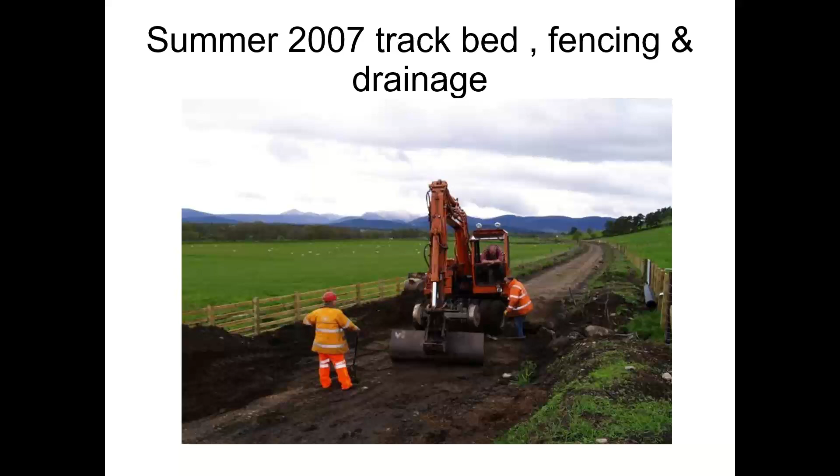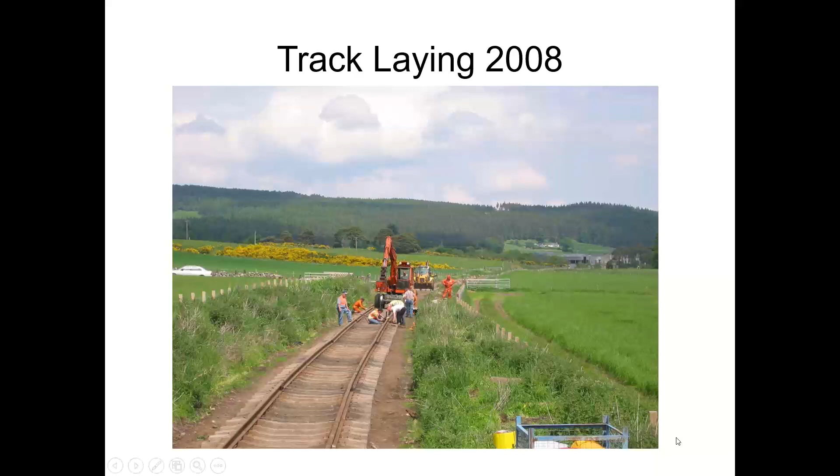Well, then a year later we've got a lot of the track in. It's all concrete sleepers, flat bottom rails, and most of it uses the fishtail clip - I think it's an SHC clip, which is a devil of a thing to get in. Once you know exactly where to hit it, they go in fairly easily. Away in the distance, just in front of that set of farm buildings, you can just about make out the masonry ornamental towers that are part of the River Dulnain crossing.

In 2005 and then again in 2007, we took delivery of many hundreds of what seemed perfectly good concrete sleepers that had been rejected from the West Coast main line, I think it was - there were lateral cracks in some of them below the rail position. Again in 2007, we were fortunate to take delivery of complete 60-foot panels of flat bottom rail that were taken out at Drumochter. Using these rails and concrete sleepers gave us all we needed to get the railway built out to the River Dulnain, with plenty left to go part of the way towards Grantown-on-Spey.

Now here we are at the River Dulnain before the original Joseph Mitchell 1862-1863 bridge was taken away and scrapped. Terribly sad really, but that's the way it is. In common with most bridge structures on the Inverness-Perth line from that date, amazingly ornate masonry was built to no great purpose other than to appease the local landowner. This bridge is near nothing - nobody lives nearby, nobody looks at it, it's pretty remote, yet it had these wonderful and intricate towers and turrets.

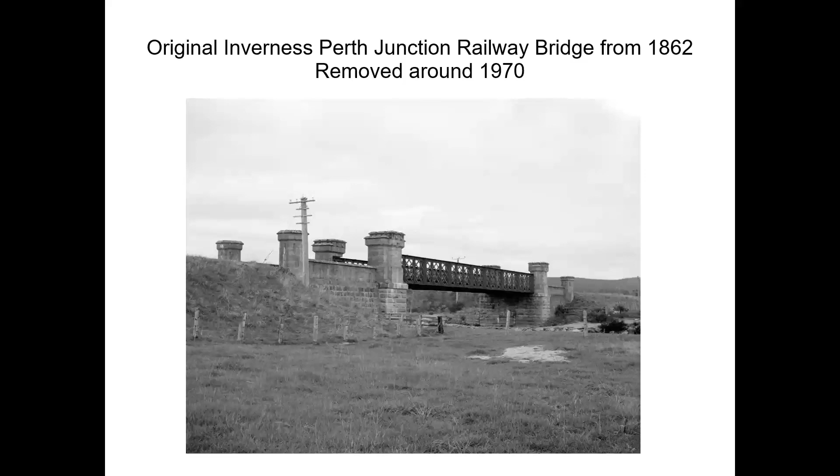So that went away, and we were faced with finding the money and wherewithal to re-erect it in a modern fashion over a gap of 80 feet. We knew that whatever happened, it would have involved taking a bridge, new or second-hand, to site by rail and then lifting it onto the masonry abutments beyond. So we stopped the track about 3 panel lengths back from the bridge and left the erection for another day. However, by this time, a solution had manifested itself.

I'll talk briefly about this. In our exploratory works prior to re-erecting the bridge, we came across these amazingly intricate roller bearings, which were part of the original Highland Railway Bridge, left behind. All 4 bearing points had these complicated rollers and double plate arrangements, which must have been anticipating an awful lot of longitudinal movement when these were devised.

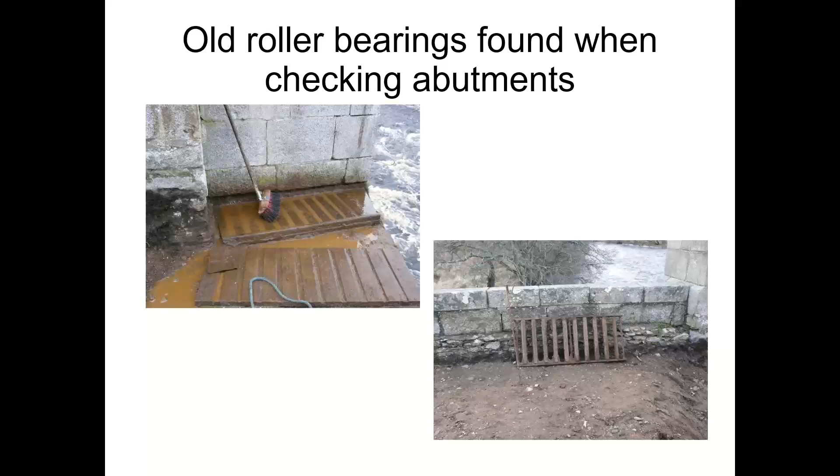I think amongst the group tonight there's a certain Davy Dow, and he was, I'm pretty sure, instrumental in locating this bridge structure you can see in the top left. I think the late Alan Stewart was involved, and possibly yourself, Stephen, as well.

I went down with George McNair to have a look at said bridge, which is in Merry Street between Motherwell and Carfin. It was built in the early 60s as an access. The owner had no need for it, and were prepared to offer it to the Strathspey Railway if we could use it, provided the Strathspey Railway took it down and transported it up to Inverness.

I went down there with no real set impression what I was going to find, but as we looked at it, measured it, and checked out what we could by looking into the hidden cavities at the bearing points, it seemed to be in tremendous condition. A report was done, presented to the Strathspey Railway Board, which I wasn't on at the time, saying the bridge could be used. It was a twin road bridge, as you can see in the bottom image. All we needed was the two side girders and one set of deck beams.

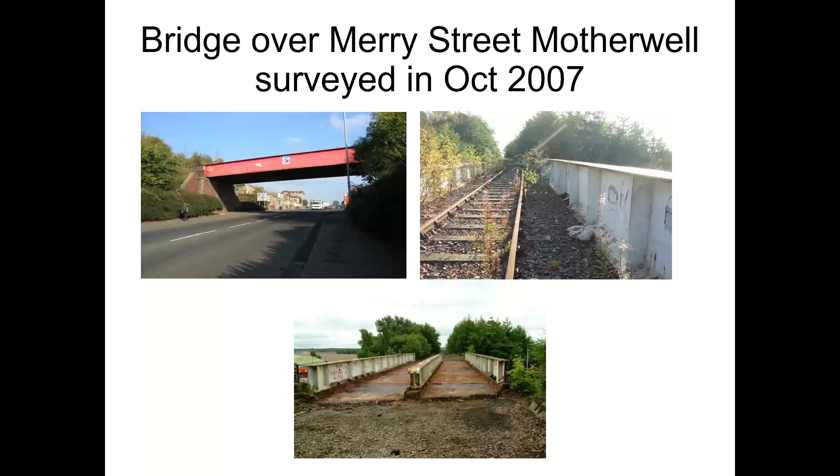A wonderful image that Stephen Muirhead found for us of the bridge structure going up early 60s. Pretty rudimentary traffic management and not a safety hat or high visibility vest to be seen.

After a period of deliberation, the Railway Board, I wasn't involved in this, but a contractor local to the site was engaged, who dismantled the bridge in summer 2008, I think it was, about almost a year after we surveyed it.

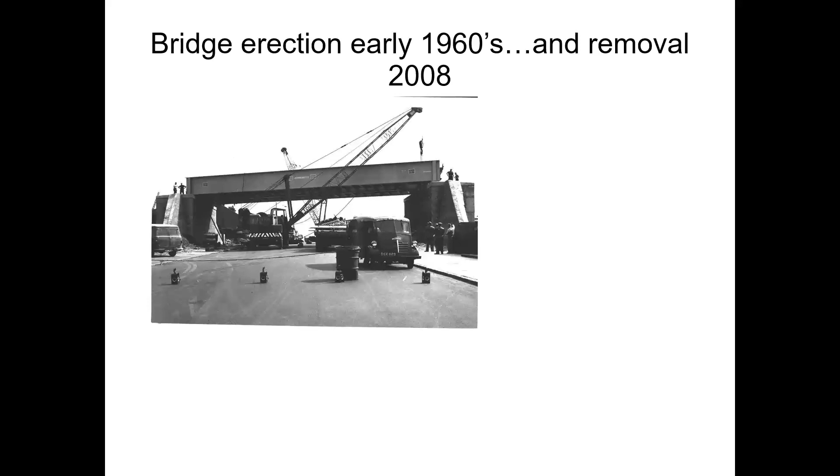It was taken to a yard, broken up, and the components we needed were taken by rail from Mossend, all the way to Inverness, and then stuck on the front end of a southbound train and thence to Aviemore. From there we pulled it to Boat of Garten and set it into store until we could get round to modifying it, painting it, and hopefully then erecting it.

There was a lull for a few years, and the Rails to Grantown group sort of evolved from the main company board, and various things happened. Not an awful lot happened in the field, to be honest. Money was the main consideration.

The Rails to Grantown group got themselves a new chairman, a non-railway person, but who has left the organisation now. But what he did seem to have great skill in was getting money out of different people and wheeling and dealing. His name was David Fraser. He, with support from the Cairngorms National Park, Highlands and Islands Enterprise, and some persuasion, got the bridge girders modified to the design I did, and painted.

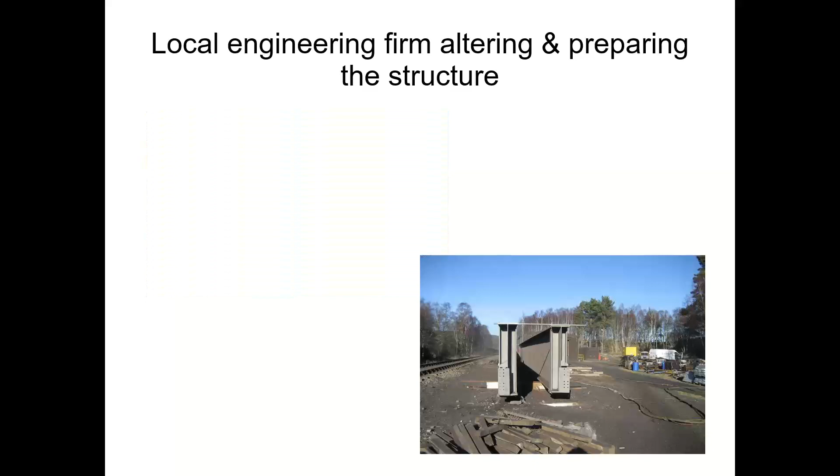And we cut up the deck components into individual cross beams to sit between the two cross girders. This was all done in late 2012 into 2013.

I remember an impromptu meeting in the lodge at the Strathspey Railway, and I think Stephen may well have been there, and David Fraser certainly was. We got chatting that this bridge, as erected on the North Yorkshire Moors Railway a year or two previous, had been done at very favourable rates by Volker Rail, and perhaps similar could happen in the Strathspey.

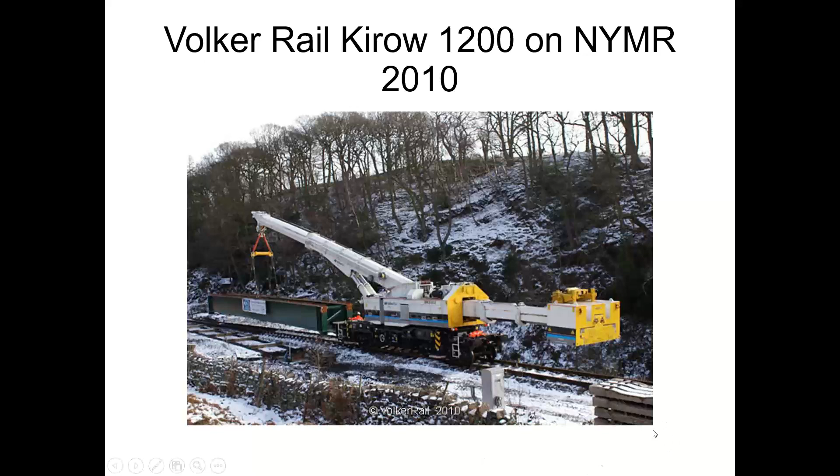To David Fraser's credit, he got the names and addresses of all the firms in the UK who had a Kirow crane with the ability to drop our bridge into place, and he went away to speak to them. I think that meeting might have been late summer, early autumn 2013.

I never really thought much more of it until one day David phoned me up and said, Colas can erect the bridge and they're coming to do it on the 13th and 14th of February. I said, next year or the year after that, David, because whilst we had track out to the River Dulnain, it was far from complete. Lots of fittings weren't there, joints were fly fished one bolt instead of four, and a gap right up to the bridge had still to be installed.

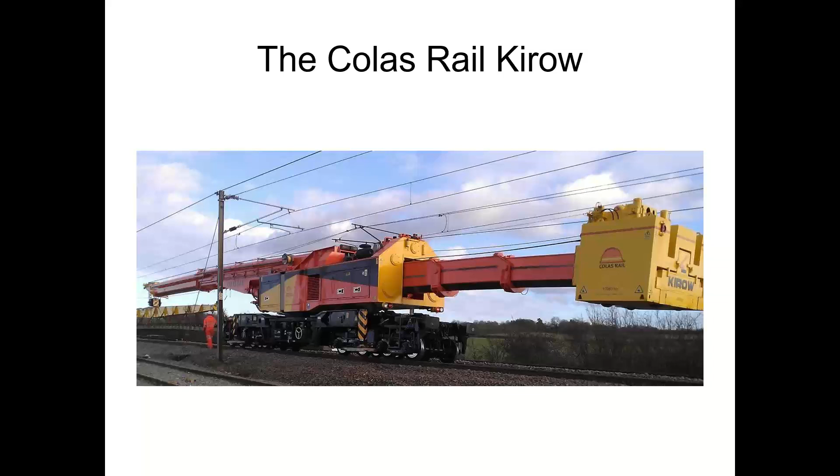However, we deferred all permanent way work elsewhere in the railway that winter and set down to getting the track up to scratch for Colas to come, and managed it with a fairly open winter. I think you were there by then, Ian, and I don't remember many weekends we didn't get working. No, I think we worked every weekend. The weather was okay. Colas sent their supervisor up. We ran him from Aviemore right through, checked all the overbridges and things, and was very satisfied with the track that the crane had to run on to get out to the river. And up it came 12th of February 2014.

Strathspey's own Class 27 pulled the Colas setup through from Aviemore the day before, on the 12th.

Here it is, just north of Broomhill Station. The bridge to be erected is on the left of this image. The crane, as you can see, is pointing the wrong way, so we do a swing round, and that's another double image that's gone wonky. The two girders had been got ready, and they were taken through a few days before.

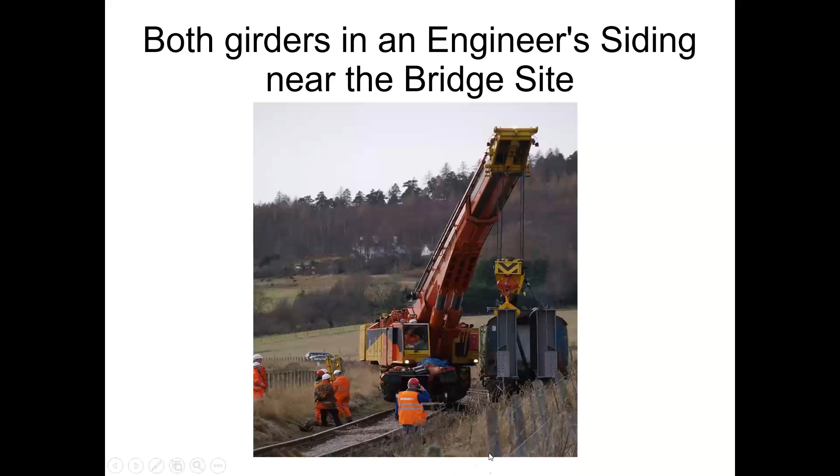Parked in an engineer's siding that we had the foresight to build just short of the bridge, and the crane was an absolute wonderful piece of kit. It was just effortless. 15 tons, was just nothing to it. It ran along beautifully.

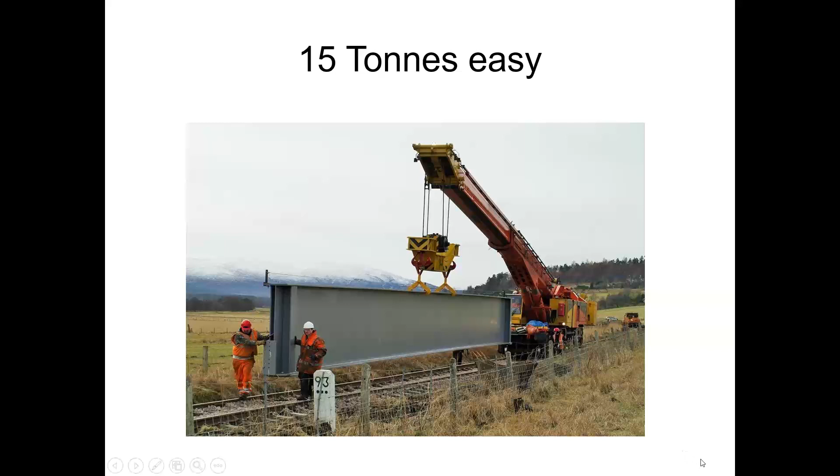Oh yeah, there was lots of spectators that day, including a BBC outside broadcast unit. This thing made the BBC News that night, and there was also somebody flying around taking drone camera images, which is the first I'd seen of these little things.

This is the upstream girder going in, and the downstream girder, which probably won't show - did briefly. We knew everything would be a tight fit, but it fitted as was expected.

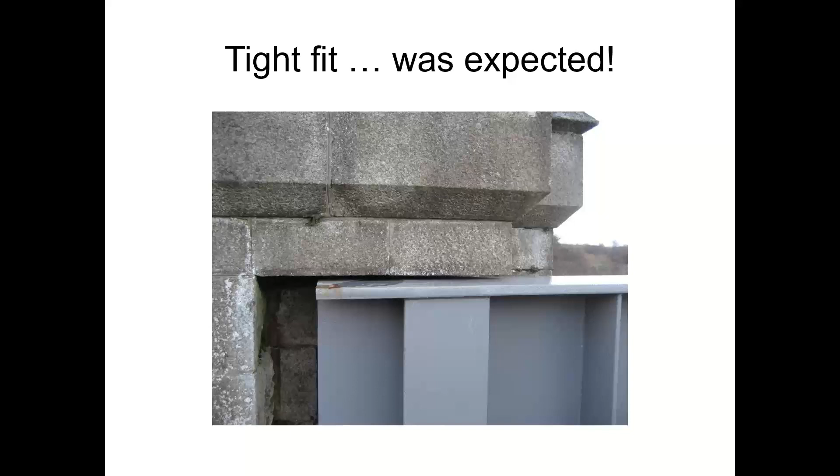So by lunchtime, the two girders were in, no hitches. We had our lunch, happy and contented. The Spey people there are the ones with the dirty high visibility vest. The fella with the yellow hat is David Fraser, who was, I suppose, as pleased as any of us. And the chap next to him was Jock Hay of Colas, who was a wonderful guy, very, very good to work with.

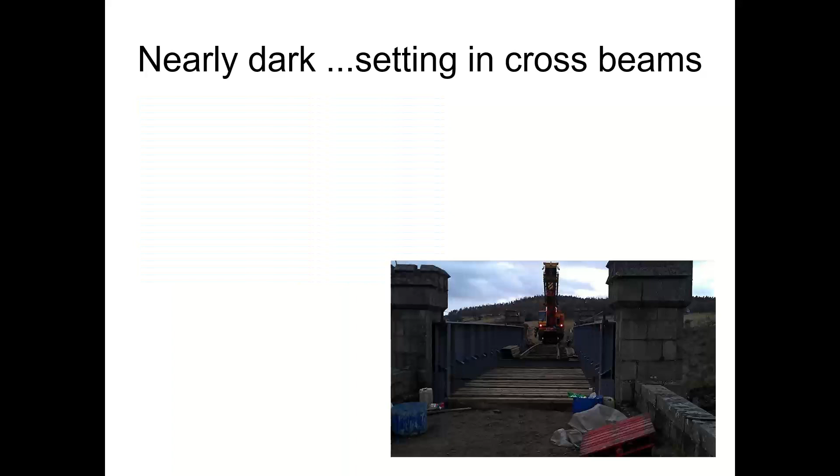I think the crane worked that afternoon until it was dark, getting in the cross beams and doing as much as we could before it went back south. No, that one didn't stay. I wasn't there the day after the erection, but as far as I remember, the crane was finished with by lunchtime, everything was gathered together. We pulled Colas set up through to Aviemore, and the crane went away south on the 15th.

Then later on that year, we decked out the bridge. There was a channel way beam underneath each rail and a timber beam set into that, and the rails are screwed down onto the same, and the deck is closed off in timber.

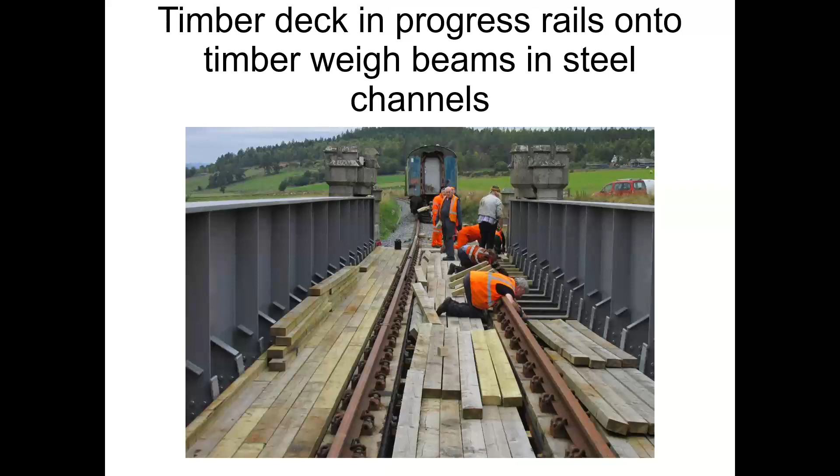A couple of years ago, we had to get a steam engine onto it for photographic purposes. This is Caley 828, the Caledonian Railway loco that resides at the Strathspey Railway. It's owned by what are known as the Caley 828 Trust now. And I think it's the only steamer that's sat on the bridge.

And since then, we've done some fettling up. I think the pegs that you can see there are Chris Doig's handiwork. The new bridge deck construction is a lot beefier than the old Highland Railway one was, and the railhead level is somewhat higher than it used to be back in BR days. So there's a bit of bunking up with ballast to get everything to the right level.

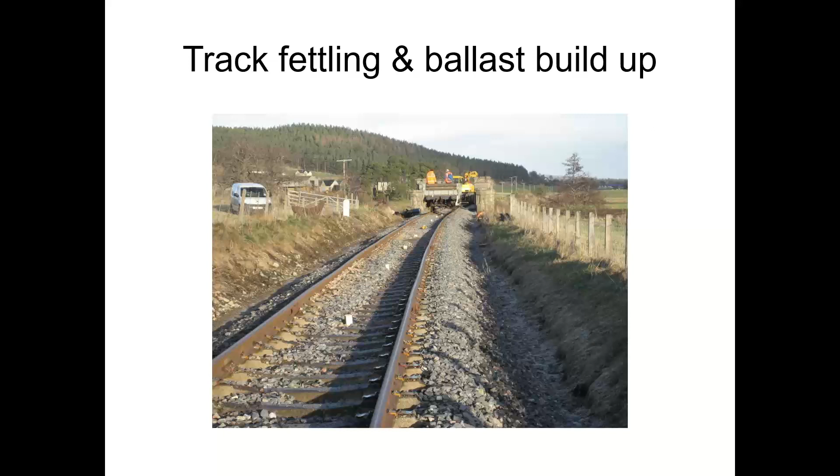And there is the bridge as was last summer, desperately waiting for trains to come trundling along from Broomhill, over it and onwards towards where I'm sitting, towards Grantown-on-Spey. And I think that's the last of my images, Ian.

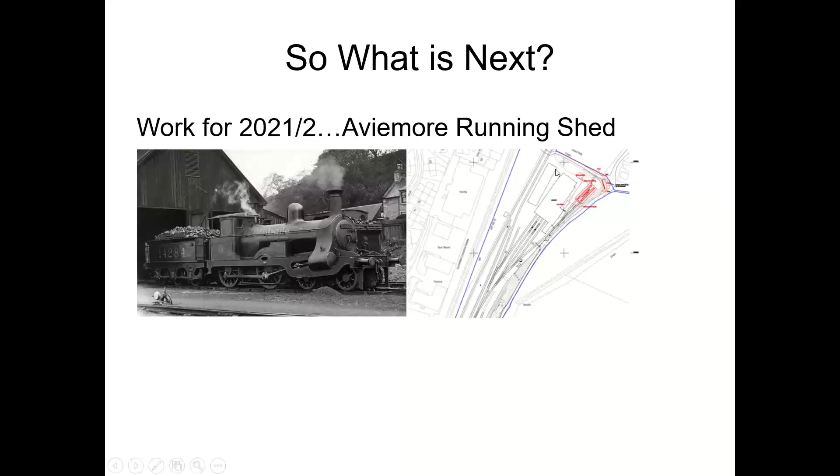You can see that we have the 4-road engine shed that's still there, and adjacent to it, our carriage maintenance facility. And that is what it's proposed to look like.

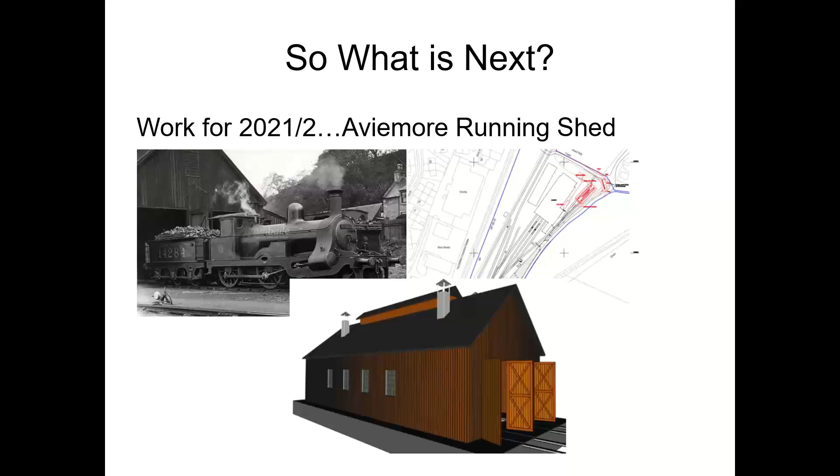The Permanent Way works are due to start imminently. We have done some of the demolition works and much of the material has been transported down to site. So I think over the spring and summer, we can look forward to some hard labour laying in the new alignment.

The big question is, though, are we going to get to Grantown? I think the general feeling is, well, yes, we'd very much like to, but there is a very big but, of course.

There's always been a long-running desire for the Strathspey to go from a place to a destination. And of course, much as Broomhill is a lovely spot, it can be a bit windy. As Mike has made clear, it's kind of in the middle of nowhere. The nearest village, which is Nethy Bridge, is about 1.5 miles away.

The Rail to Grantown team has taken several forms over the years, but it was reconstituted late 2017, 2018 I think it was, and in a relatively short period of time, a draft TAWS order was submitted to Transport Scotland.

That was in 2019, and consultation was held with the local public in Grantown, in late summer. Comments came back, as they always do, and unfortunately, because the environmental statement had taken quite a long period to action, it was felt by the National Park, amongst others, that the ecological survey work in that draft was now out of date. So we had to go and do it again, which is several thousands of pounds.

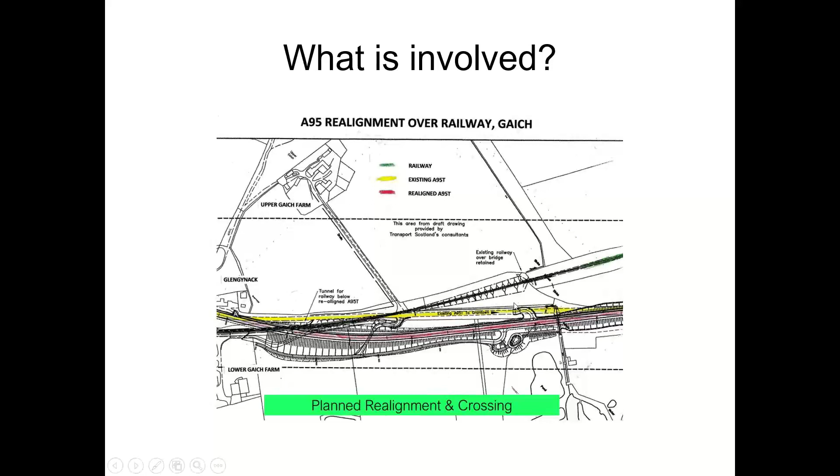So that shows the current A95, which is a strange alignment, the proposed A95 in red, and the reinstated railway line, including the earthwork, which goes two-thirds to the right of the image. Beyond that, the earthworks are still in place. It's colloquially known as the bridge to nowhere, because the abutments and wing walls are still there, but the earthwork has been taken away.

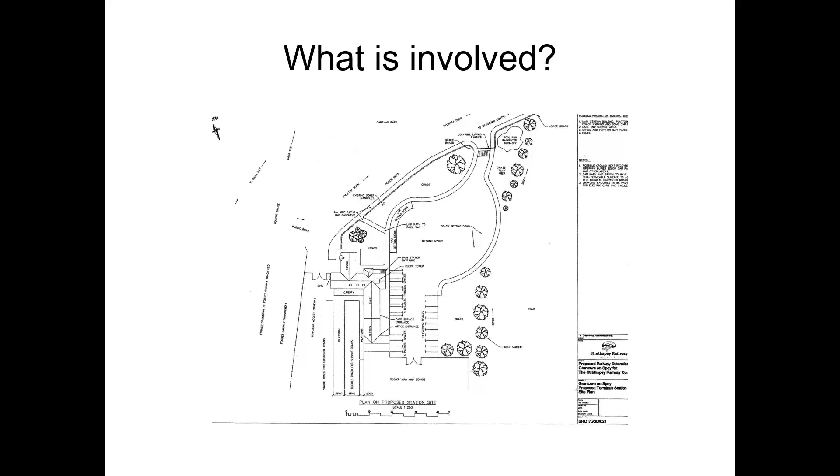This is the chosen site for the station, and will involve us dropping off the alignment through new earthwork into the station site, which is felt will be more than big enough for our purposes. That is an outline of the proposed station site. It's opposite a caravan park, so it's felt it's a good location in terms of footfall, but also in terms of access.

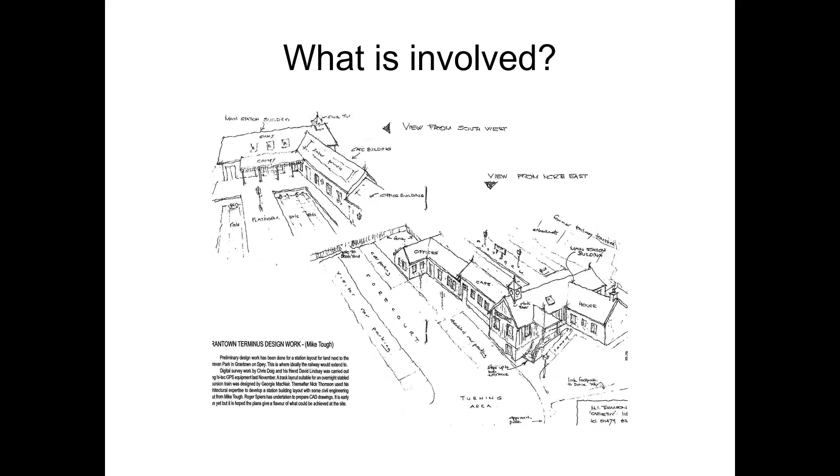And that is architectural drawings produced by the former finance director of the Strathspey Railway Association, who prior to his retirement was an architect. The feeling of the buildings is very, very similar to those at Aviemore, albeit in a different orientation.

So, how much? It's a big number, a very big number for the total project cost. We think the Scottish Government element of it is about 5 million. Rail to Grantown need to find 2 million.

Rail to Grantown also need to find 2 million for funding for the station and the track, although obviously some of that will be in kind because of volunteer effort, and that in kind is thought to be upwards of £1 million. Now this was produced a few years ago, I have updated the date. We don't believe that we will be likely to see significant work, depending on funding, before 2025.

The Scottish Government approval is uncertain without the £2 million contribution. But without an approved TAWS order, how can we raise the money? So we are in a bit of a cleft stick there, and a catch-22 situation.

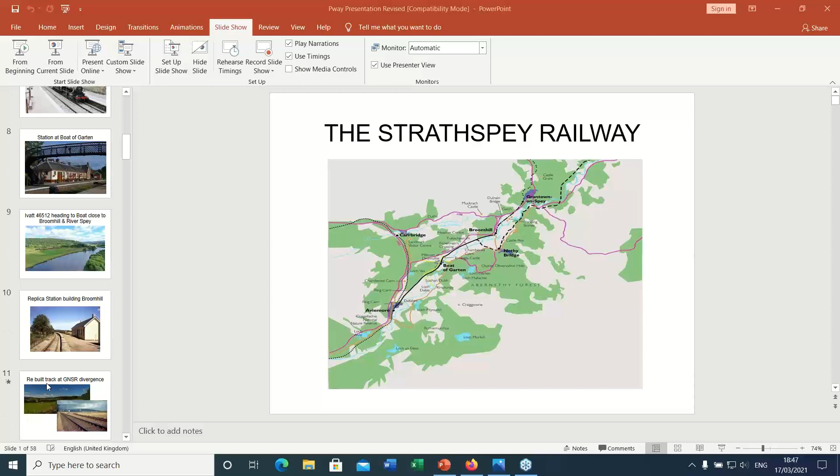And the other image in the same, in the winter. My other observation was you mentioned the SHC clips on F19 concrete sleepers. In my opinion, these were the best concrete sleeper ever invented, and I regretted their demise when there was plenty of them on the southern west coast, down at the Lockerbie-Carlisle end of the west coast, when I was in the maintenance team there. Seeing the local boys tackle SHC clips as a two-man job with a heel bar and a chisel bar, it was stand back and let them at it, and watch you don't get struck with one. Entirely safe, they knew what they were doing, and they could rip out those clips quicker than you could take out panel clips. I love the F19s.

A question about your bridge way beams on the structure. Did you mention, and I might have missed it, if they were hardwood, and were they new or second-hand?

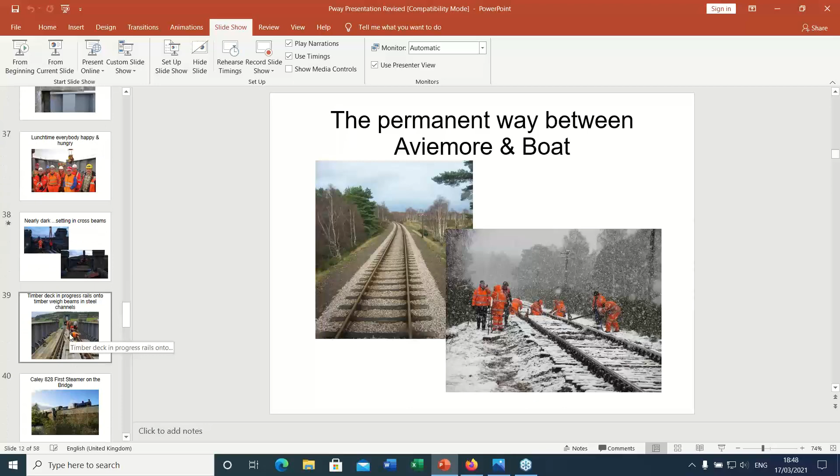The structural part of the way beam is a steel channel with toes up. The cross beams on the bridge, Mary Street Bridge, are at metre centres, so we're not carrying a big span really. The timber that sits into the channel is new redwood, Douglas fir, which on its own would have spanned the gap, so it's double strong. There's a steel channel section underneath that, and timber onto that. So the steel does the work on its own.

The supplementary question was about gauge control - is it maintained by the channel spacing, or do you have tie bars? The steel channels are attached with brackets to the cross beams below, which doesn't show up in that image, but it's a steel to steel fixing that maintains the gauge, and the timbers are a tight fix into the steel channel.

And having got the steel and timber assembly together, we then - I forget what type of base plate that is, it's a sort of a dumpy sort of plate. Looks like M6, with Pandrol clips. Not the pan WBM, because WBMs have got inclined chair screws, which are tricky to fit unless you know what you're doing.

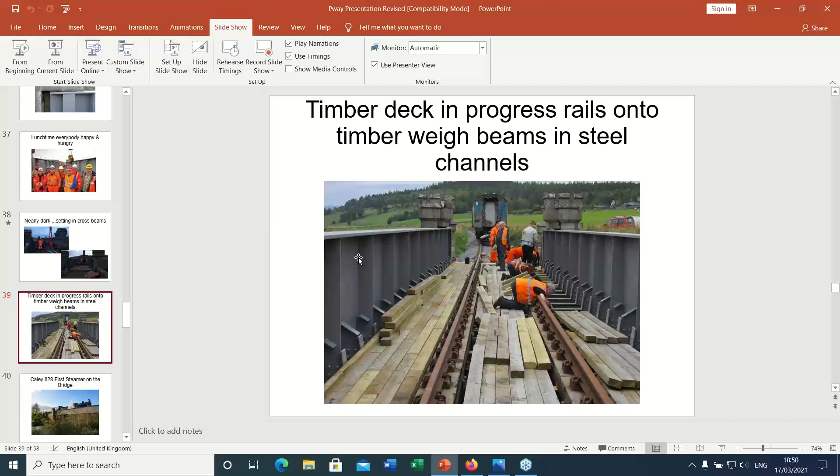Last observation question for me then, before we go to questions from the audience. Observation first - the strange S&C combo at your new shed appeared to be a turnout and a set of trap points combined in there. Are you going to do that one, Ian? I'll do my best. Yeah, that's correct. That's down to the PWI brain of our outdoor work superintendent.

Absolutely fantastic, I've never seen that combination before, but I can understand how it works, and what's not to like about it. Can I jump in here, Tom? Yeah, I think that's an absolutely great combination, a very unusual one. The only place I've seen something like that out on the big railway was Hillside Maltings. But yeah, absolutely great, it makes the layout so compact, and a big thumbs up to Georgie McNair for that. I think the site was so compact - I think Rob Law, who is Stephen's right-hand man on S&T matters, was party to that arrangement as well. Very much so. Just shows you what you can do with a rail saw and a Jim Crow.

My last question then is about your new platform, and maybe a tongue-in-cheek question - have you considered if the new platform would be a polystyrene one? There's an interesting thought, we have a previous presentation featuring polystyrene platforms, and they appear to have a lot going for them in terms of construction depth. It's kind of like a 2-inch scrape and blind off with sand, place a big polystyrene block, stick a copper on top, and walk away. Very quick to construct, road rail machine only required.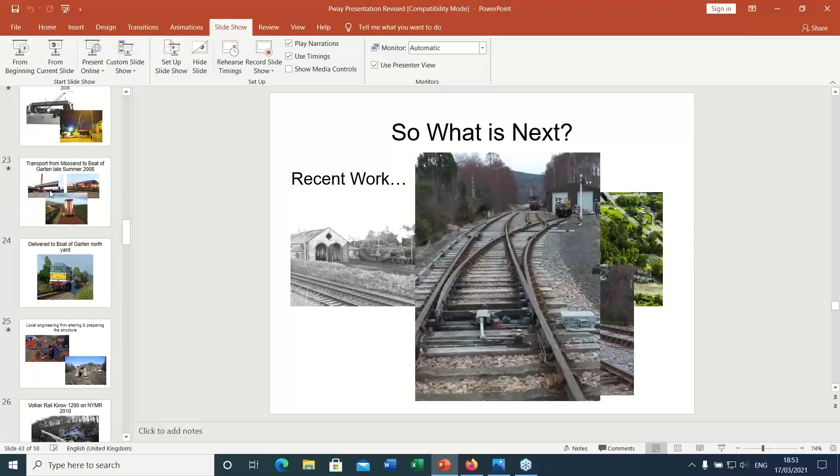We made use of the bearings that came up from Merry Street. One end was a basic sort of simple rocker bearing sitting into a cast steel shoe, and the other end was a sliding bearing, a downstand underneath the plate girder, again a cast steel shoe that allowed for longitudinal movement. We cleaned them up and put grease in there.

Have I gone mute? No, don't think I have. No, you're okay. Something flashed on the screen.

The beauty of doing it as an open way beam structure is we can still get into the bearings to have a look at them from time to time. So we reused the bearings as installed in 1962, and sat them on top of these iron roller bearing pieces of metal work that we found.

The abutment walls we checked are solid granite, about 2 meters wide, a wonderfully well built piece of masonry. It looks like something from the Aztec era, close jointed blocks.

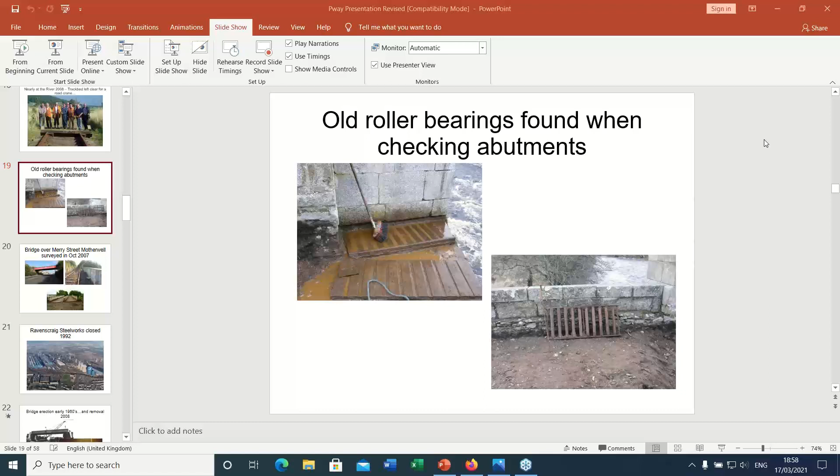So Ian and Mike, a really great presentation there, thanks for that. It's a topic close to the hearts of many PWI members, as many have been involved in the Strathspey Railway over the years. It reminded me of one of my very first bosses when I joined the railway, Matt Innes, who spent almost every weekend working on the Strathspey Railway. It's really great to hear the history of the line and the changes to the rail network in that part of the world as a result of the Beeching cuts. You had some cracking photographs from the early days right up to recent times, really stunning scenic views, especially the Perth Junction Railway Bridge—that looked amazing, and it reminded me of Och Viaduct at Blair Athol, which is also very ornate. As you said, Mike, they're mainly built that way to appease the landowners at the time. It's a line I've never visited personally, and it's definitely on my list when we're allowed to. Hooray, well done.

So I was quite surprised to see how good the track looked, as Tom commented on, given that it's run by volunteers and has bullhead rail from the 1930s. It's quite incredible to see that cess you could run a bike along. All credit to yourself and the others who put in the hard work to get it to that standard. It was also funny to hear your positivity about the SHC clips, as they're generally completely cursed when discovered on other running lines on the network, but that was pretty good. One thing that struck me was I hope it's all recorded somewhere where all the materials came from - for example, the bridge from Motherwell, panels from Drumoctor, another structure from Mossend, etc. I think it's important that information is kept somewhere so we can trace back where all that infrastructure came from.